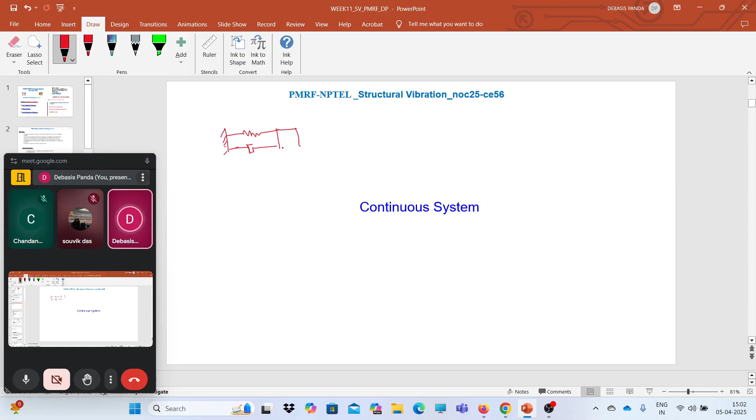we have been dealing with discrete systems where we use spring mass dashpot systems, right? Just recall, we have actually discretized the system as per the generalized coordinates or as per the degrees of freedom. That means we have defined the masses, right? So for the single degree of freedom, we can define this as the degree of freedom, and subsequently for multiple degree of freedom systems, we can add this model, and we solve the shear frame or shear building model using the discretized mass concept. So we can discretize any continuous system, that is not the problem, but there are still continuous systems we haven't talked about.

Like during the first interaction session, I discussed that we can model the mass as a lumped mass where, like, we have a cantilever beam. If we have a cantilever beam like this, we can model this as a point mass, as a single degree of freedom system, with spring and damping properties. On the other hand, we also discussed that we can model the mass as a continuous mass, where the mass will vary as per the length. That means the mass is denoted per unit length, right?

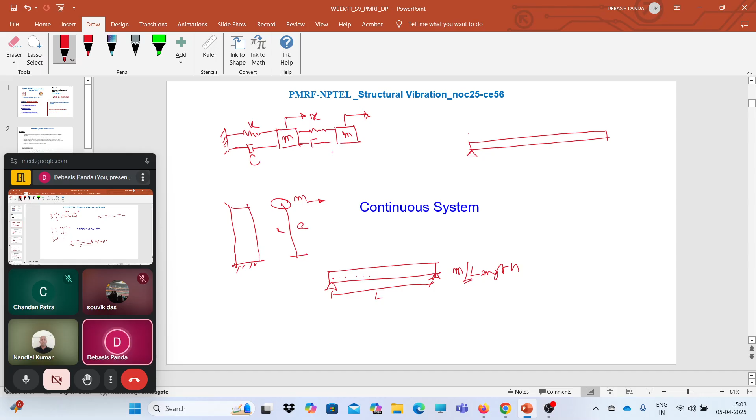So today we will precisely go through the continuous system, how we can solve the entire dynamics of a continuous system. Say for example, instead of any spring mass system, we have a simply supported beam.

Nandalal, yeah, do you want to say something? No, sir, no, sir, no, sir. Sorry. Oh, yeah, no issue.

So if we have a beam like this, say X and Y, and some forcing function is applying over the beam, and the beam has, say, length L, and the beam has mass, say for example m bar. This is the mass per unit length.

Now the thing is, here we know precisely one mass is there because we have modeled this as a lumped mass system or a discrete system, so we know the position of the mass. Now here we can have multiple degrees of freedom corresponding to each of these positions of the masses. That means if we consider a number of points, there should be a corresponding number of degrees of freedom, and correspondingly a number of natural frequencies will come. So how to solve this type of continuous system, or how to capture the dynamics of this continuous system, we will see.

So first, for the transverse loading, if we want to consider the transverse loading case, for a continuous system, we have this beam of length L, which has mass m bar, the mass per unit length. We have the flexural rigidity property EI, and one loading is applied on this continuous beam.

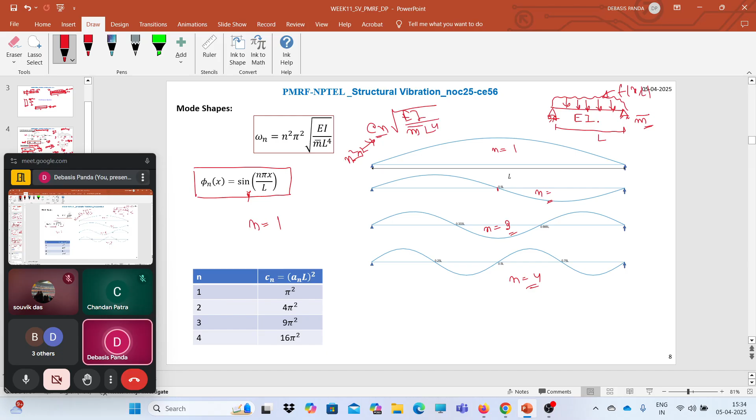So that is the free vibration case for the simply supported beam, and we have seen what will be the natural frequency and mode shape information of this beam. From here you might have this kind of question: for a beam, the mass per unit length is given, EI is given. Now, till now we have considered the loading case as zero because we are considering the free vibration case, right?

We will see the force vibration case. So for now we are considering the free vibration case, that means the forcing function is 0.

So they will ask what will be the natural frequency for the first mode, omega 1, and what will be phi 1 of x for that case. If all this information is provided, you can easily calculate it. Or if asked for the first mode and say the third or fourth mode, what will be the ratio of the natural frequencies, you can easily find it out. Like what will be the ratio for n equals 1, first mode, or n equals 2 and n equals 4, fourth mode.

That means omega 2 and omega 4 for the simply supported beam in the free vibration case. Tell me, what will be the ratio between those two? Same beam, say for example we have a beam - which n equals what? N equals 2 and N equals 4, second mode and fourth mode. What will be the ratio between the natural frequency of second and fourth mode of this beam? Say length L, EI is given and M bar is given, same beam. So what will be that?

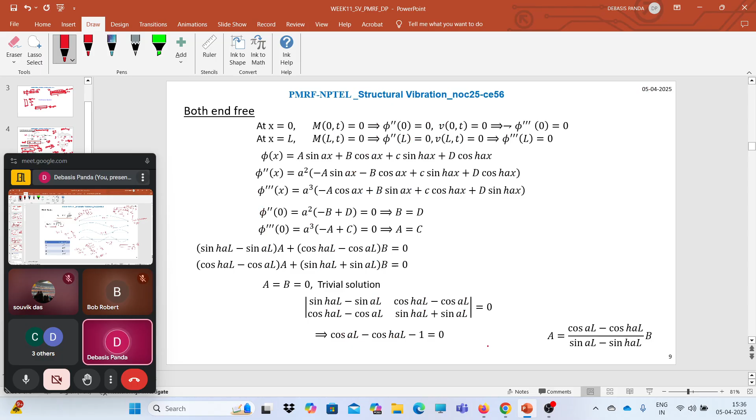I'll just show you this problem. Find out the ratio between the natural frequencies of sixth mode - actually I have changed the question, in your question something second or fourth mode will be there. Sixth mode and second mode for a simply supported beam. So it's nothing but n square by n square because all the properties will be same. So omega 2, omega 4, or omega 6 - here I have considered 6. So it will be calculated like this. Get my point?

Okay, and also they might ask for the natural frequencies. So from this section, what you need to recall is these two parts: what is the natural frequency, and what will be the mode shape information.

So here we have considered a sinusoidal function to calculate the mode shape, but precisely there are other ways to calculate the mode shape. If you have knowledge of the finite element method, their shape function to calculate the shape function - we have different kinds of methods, Rayleigh-Ritz method, Rayleigh method itself, and all these kinds of things. But these methods are irrelevant for now, we'll stick to these things.

Okay, so now if we have both ends free, what will happen? If we have both ends free, we have two expressions - one is for phi of x, one is for y bar of t. Y bar of t is nothing but A cos omega n t plus B sine omega n t, and this is the function with respect to time. This is the function with respect to the shape.

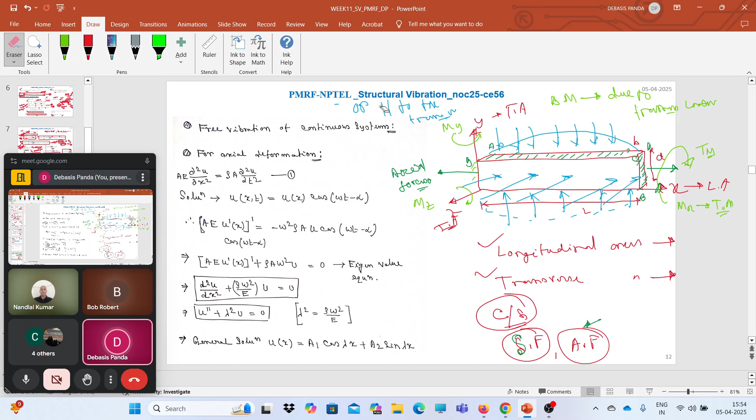Yeah, it's the very basics of civil engineering, and everyone should know this concept. Otherwise how these loads will affect the material and the shape and the geometry, we will not have a clear idea, right? So these things must be clear at the very beginning. As per this axis the stresses are defined, like normal stresses, longitudinal stresses, then on the principal axis the principal stresses. Once you have cleared these basic concepts, everything will fall in proper path.

Okay, now till now we were solving the transverse loading case for the free vibration case. Now we may have the axial loading. So for the axial loading we need to solve the governing differential equation. Now it's a finite element problem.

Like if we have a simply supported beam, or a beam, say for example we have a cantilever beam and an axial force is applying here. Now what will be the case? So for the axial deformation, the governing differential equation looks like AE. I'm not going to derive this expression, it's a very basic expression.

If you look for any finite element book, what is the governing differential equation for axial deformation of a beam, you will find it out. It's simple. Bob, you want to say something? Sorry, I was doing something.

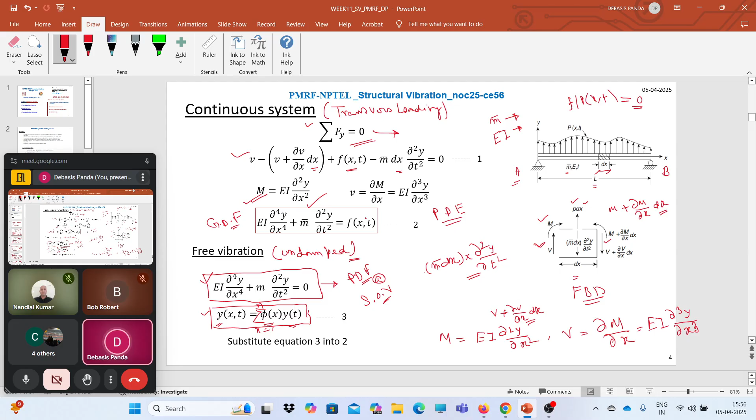So for the axial loading case, similarly, the governing differential equation will look like this. Now for this we can have the solution u here. U of x,t is the variable which caters with the length, and we have one function for the time variable. The process of derivation is quite simple: take the solution, then you just need to differentiate it with respect to time and differentiate it with respect to x, and then substitute within this equation. So finally, once you substitute this, you get this equation: d2u/dx2 plus rho, which is the mass per unit length, or the density of this beam, whatever you want to define, omega square by E, u is equals to 0.

So finally, this equation, just recall, u double prime (x) plus rho... or simply we can simplify this equation like this, some constant lambda square into u is equals to 0, where lambda square we have taken as rho omega square by E.

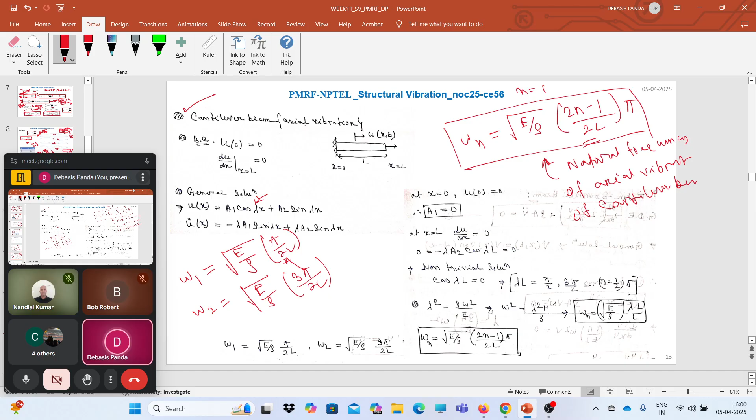What will be the second frequency? Omega 2 will be under root of E by rho. Now instead of n equals 1, you put 2. So 4 minus 1 is 3, 3 by twice L. By this way we can calculate the natural frequencies and corresponding mode shapes.

For the mode shapes, phi(x) is nothing but C sine(lambda n x), and lambda n we have already calculated. So for the first mode this will be n equals 1, for this, n equals 2, this part 0.5 into L, and so on. We can formulate it like so.

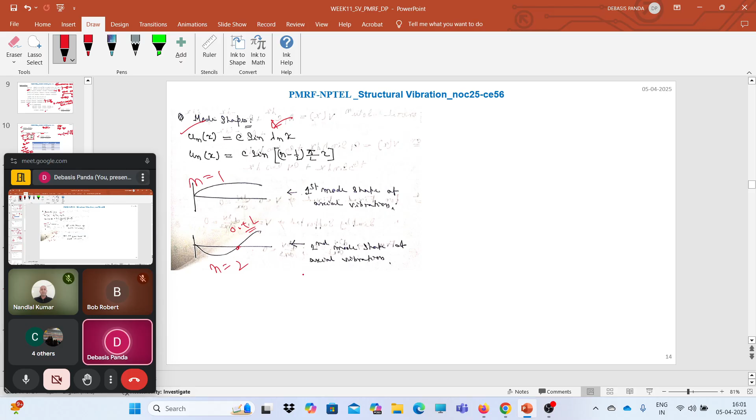For this kind of cases, I will recommend just take a pen and paper. If that thing is relevant to your work, then take a pen and paper, do all these derivations and implement it in MATLAB to clear all the concepts. If we are doing it for assignment solutions and exam purposes, then you don't need to look into those derivations, because the derivations are irrelevant to solving your problems. Your problems will be very simple, not like related to that derivation. I will show you the problems - one problem I will already explain to you. It's simple, but you need to have this concept, to know from where I am getting this information and all these things.

Now let's talk about the orthogonality of mode shapes. When we first discussed the mode shape, we discussed the orthogonality property of this mode shape. Recall, if we consider phi as a modal matrix, phi transpose M phi is nothing but M, and this ultimately becomes the identity matrix. Now phi transpose K phi is the modal stiffness, this is modal mass, and phi transpose C phi gives the modal damping properties. That means we already have the orthogonality property - if we apply this transformation, we will have orthogonal matrices of these things. And also we have seen that phi n transpose phi m should be 0; only phi n transpose phi n should be 1.

Now we will see whether this concept of orthogonality works for this continuous system or not. Obviously it will work, because in a similar way, or based on similar assumptions, we have derived that mode shape, so that orthogonal property will satisfy. So how can we say that orthogonal property will satisfy? We need to show that either phi m transpose some function phi n equals 0, or we need to prove that for the same mode, phi n transpose phi n, that means orthonormal property, leads to the conclusion that modes are orthogonal.

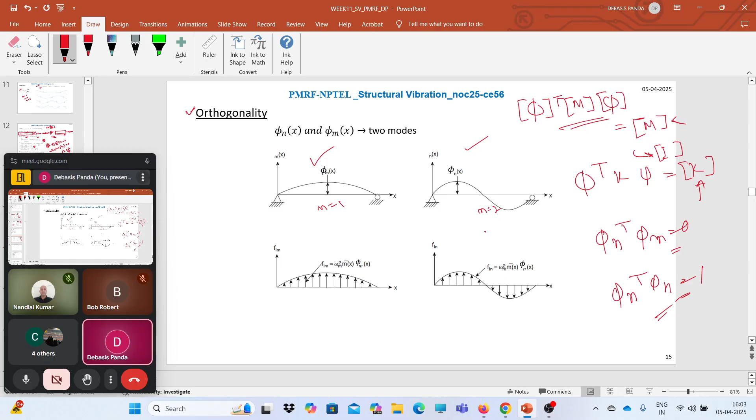For that, we need to look for the inertial force related to this. So we can easily calculate, for n equals 1, what will be the inertial force I_m. That will be related to phi_m, which is related to omega_m. This is related to omega_n, because we know particular mode shapes are related to this.

What was the definition of the mode shape? Tell me, we have discussed many times the definition of the mode shape. Tell me, what is the definition of mode shape? How can you define a mode shape? Only then can you understand why I'm writing omega_m and omega_n. Bob, what can we say, what is the mode shape?

Mode shape is nothing but... Nandlal, what is mode shape? Shapes are actually, suppose that is a first degree, here now first mode, then both ends will be node, and antinode will be... Just I'm asking you the question, what is the mode shape? Define mode shape, what I will say.

What will be the shape of the beam in that? Just forget the beam and all these things. What is the mode shape? Just with respect to some structure, you can consider any structure, forget the beam. Displacement at each degree of freedom? No, displacement at a degree of freedom cannot be the definition of a mode shape.

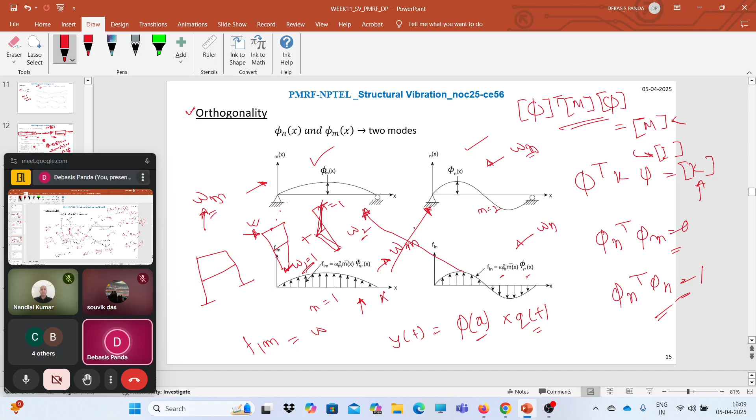Here we have these two, inertial force into mode shape. We simplify it and get this nice, short expression: omega n squared minus omega m squared, times integral from 0 to L of m bar x phi n(x) phi m(x) dx, is equal to 0.

Now omega m cannot be equal to omega n, since two natural frequencies cannot be same. So what are we left with? We are left with this part equal to zero, meaning phi n multiplied by m bar x phi m is equal to 0, and that satisfies the orthogonality property.

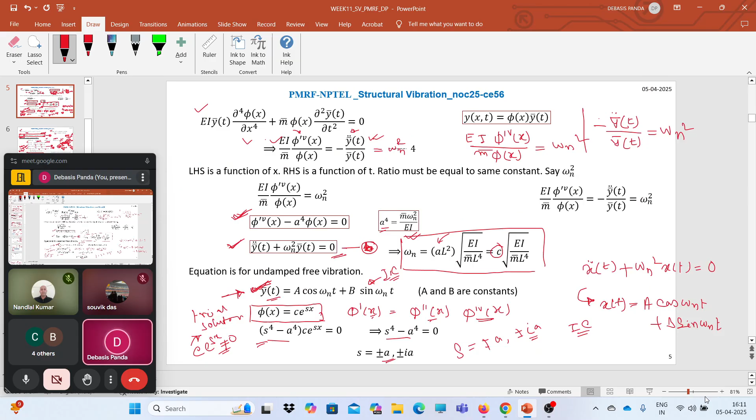Now we have left with the forced vibration part. For free vibration, recall that as we considered two functions to solve this PDE using the separation of variables scheme, we have two functions, one with respect to shape and one with respect to time. Once we solve it, we get the natural frequency and total response in terms of this.

Recall the single degree of freedom system: y of t is equal to a n cos omega n t plus b n sin omega n t. This part comes from the modal information which we use for the continuous system.

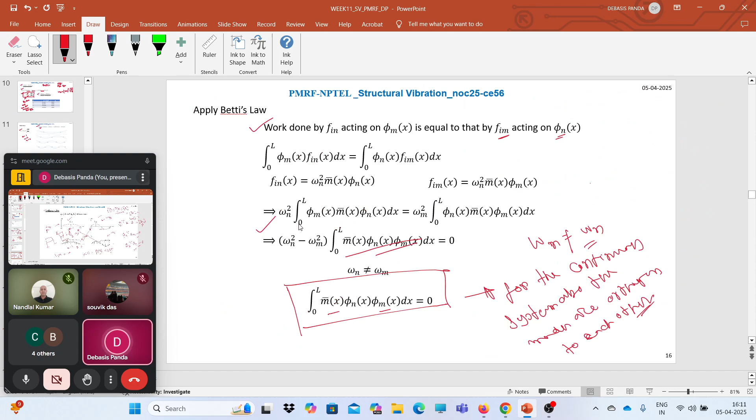That means we can have n number of masses or points, and at each point, if we consider each degree of freedom, then we may have n number of degrees of freedom.

So for example, the question is like this: select the orthogonal condition between two normal modes of different frequencies. We have just answered this: integral from 0 to L of phi m(x) phi n(x) m dx is equal to 0.

Now here, the dynamic response of a simply supported beam due to free vibration is expressed as y of t, using separation of variables, as phi of x into z of t. The length of the beam is given. Select the correct statement - what does the correct statement relate to?

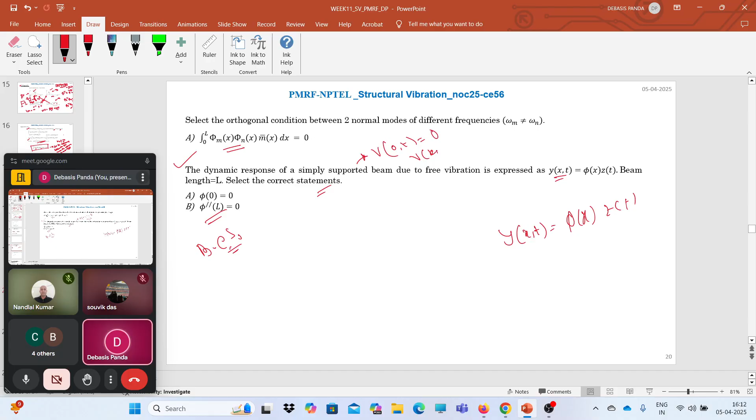Boundary conditions. Recall the boundary conditions for a simply supported beam: the displacement v at x equals 0 is 0, v at x equals L is 0, moment at x equals 0 is 0, moment at x equals L is 0.

From this moment boundary condition, we found that phi of 0 is equal to 0, and phi double prime of 0 is equal to phi double prime of L, which is equal to 0. Let's go back to that - we have already solved it.

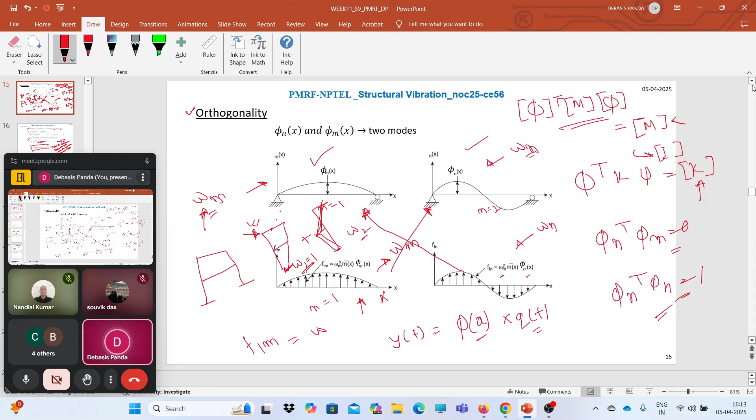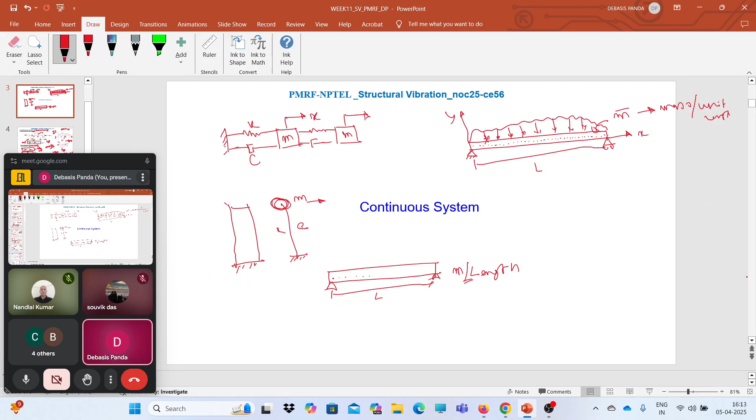What is the equation? One second, just one second.

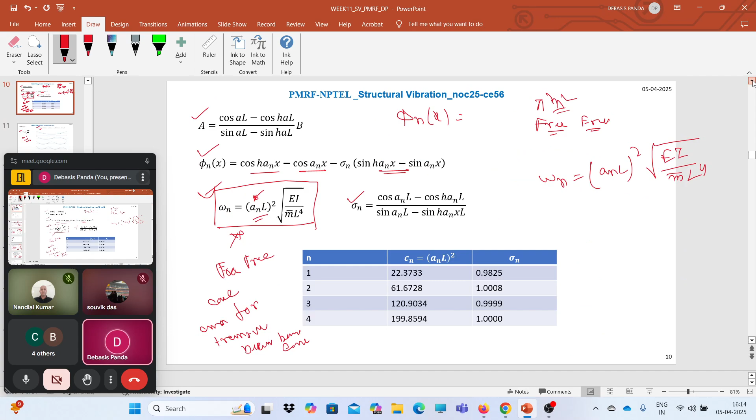Okay, we are talking about the boundary conditions, so you will find it from just a few minutes back - we just solved this equation. Where are they now? Oh, here, these two. Get it?

So we'll have phi double dot of 0 is equal to 0, and phi of 0 is equal to 0, and phi double dot of L is equal to 0. So as per the question, you just need to select the answers.

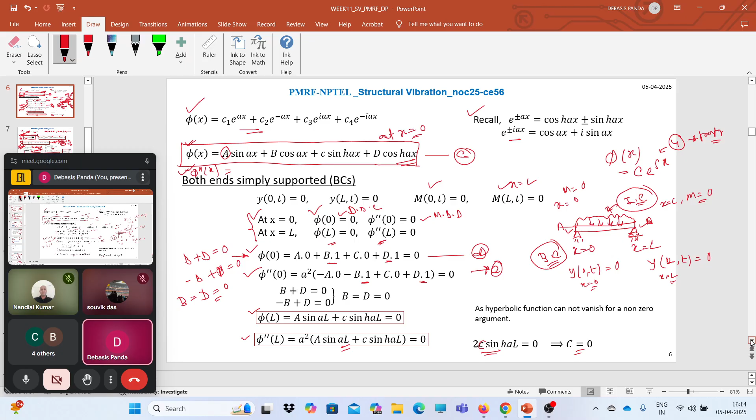Now, before going to the forced vibration part, let's quickly solve some more examples. Just focus on that - we have already discussed this.

Find out the ratio between the natural frequency of the sixth and second mode of a simply supported beam. For a simply supported beam, the natural frequency is n pi by L squared, under root of EI by m bar. So what will omega 6 by omega 2 be? Everything else is same, so it's 6 squared divided by 2 squared, that means 9.

Now the second example related to the forcing function. First we need to go through the forced vibration part a little bit, then I will come to it. Let's just spend 5 minutes here.

Now let's consider the forced vibration case. Like here, the question directly asks for Mn, the modal mass, and K, the modal stiffness. We just need to find it out from the forced vibration case. So just for a few minutes, bear with me, then we will solve this example.

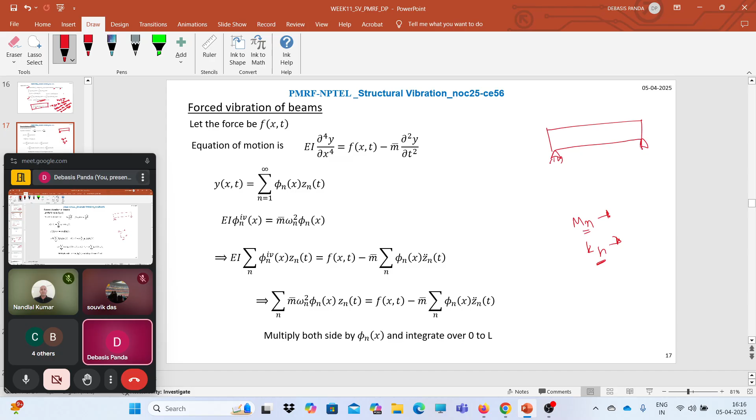So now we are considering the effect of force also, that means we will have a forcing function too. So this was f of x comma t applying over the beam of length L, and it has the flexural property EI and mass per unit length is m bar.

So the governing differential equation, just recall the governing differential equation: EI d4y by dx4 plus m bar d2y by dt2 is equals to f of x comma t. And we try to solve this equation using the separation of variable scheme.

Y of x comma t will be nothing but, if we have nth mode, then summation of n equals 1 to infinity, phi n x, zn of t.

Now similarly, if we simplify this equation and put it back into the first equation, we will have EI phi n, 4 times derivative with respect to x, multiplied by zn. Zn of t is the time dependent part, that means the modal responses, or generalized responses, equals to f of x. We are just simplifying this equation, so we will live with this equation.

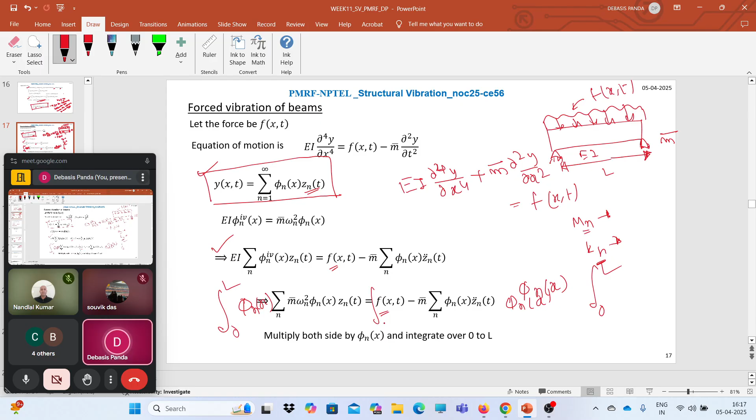Now what we need to do is just multiply both sides with phi n of x and integrate from 0 to l. So multiply by phi n of x, that means obviously that will be 1 transpose there, 0 to l, again here 0 to l. So if we simplify this equation...

we will get this: omega n squared zn, integral 0 to l m bar phi n x dx, is equals to phi m x f x comma t, zn and phi n squared x. Now if we simplify this equation, we will have it in terms of the dynamic equation we are familiar with, like mn zn double dot of t plus omega n square mn, that means k mn, zn of t is equals to fn of t.

Now if I want to simplify this equation, say this equation is 1, and I have simplified it to equation 2. So what will be the quantity of mn? Mn is nothing but this part here: 0 to l m bar phi squared dx.

What will be the fn? Fn will be the integral 0 to l, phi n x comma t, function of x comma t, dx. Now finally, if we want to complete this equation, it will look like zn double dot of t. Recall a similar type of equation we solved for the vibration case for a single degree of freedom system, or for the modal coordinates in a multi-degree of freedom system.

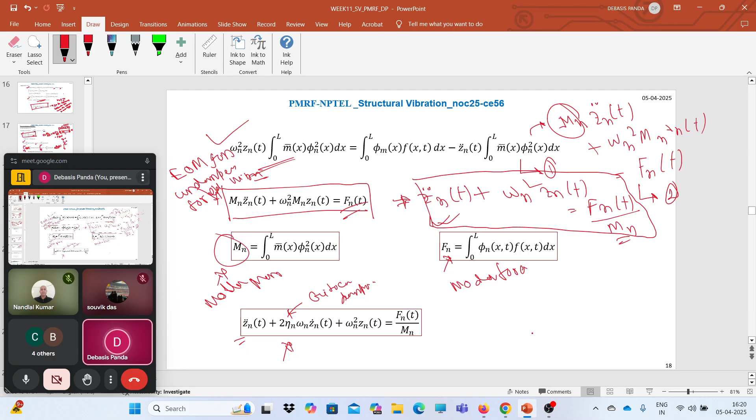It's not like a few percent damping, 4-5% damping, where some diminishing occurs. But if I want to completely diminish the vibration, we need to apply the critical damping. So we have defined the critical damping and all this part. Just go back and see the earlier video lectures, so you will find it out.

Now we can solve this problem here. Just pay attention to this problem. I have changed the data, I've changed it a little. I will tell you how you can correlate it with your problem.

It will take a minute to solve your problem if you focus on it. So a concentrated constant load of 20 kilonewton is suddenly acting on the midpoint of a simply supported beam. Suddenly acting - there is a simply supported beam and one concentrated load of 20 kilonewton is suddenly acting on this beam.

That means suddenly acting on this beam means it will create vibration, right? It will create the vibration. I will discuss some more concepts.

So in practical terms, does it look like when something falls on the structure, or when there is a sudden collapse from a building? In real terms, what can you relate it to? Yeah, it's sort of an impulse force. Impulse. Okay, and we have solved response for impulse forces.

Recall the Duhamel integral we used to solve impulse forces, generalized forces. It's sort of impulse - it will create vibration on the system, right? It's an impulse, meaning this force is acting suddenly for a small duration of load.

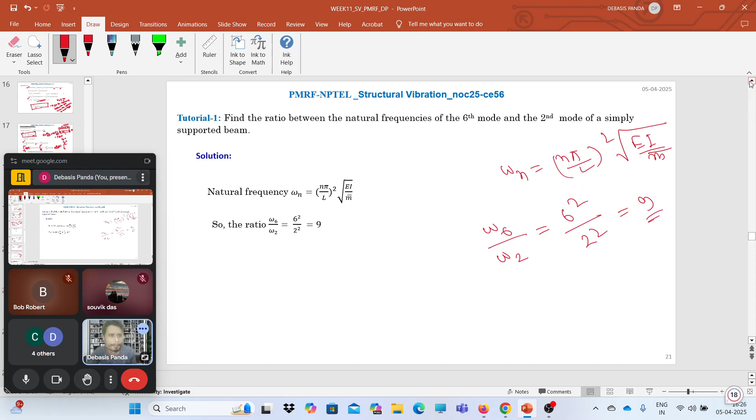We have just seen this a few minutes back. Generalized mass is nothing but the integral from 0 to L of m-bar times phi n squared dx. That means for the corresponding mode shape you need the mass per unit length. If you have these two pieces of information - modal information and mass per unit length - you can get the modal mass.

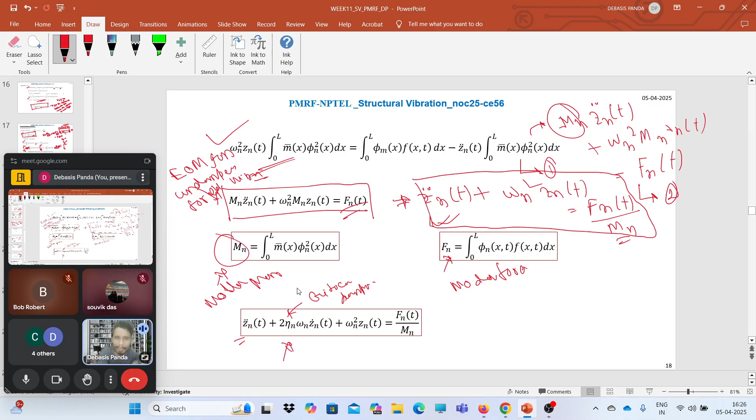Recall when we solved that multi-degree of freedom system, the modal mass we can easily calculate using phi transpose m phi, or phi n transpose m phi n for each component, to get each component of the modal mass matrix. Here also we will use that equation to get the masses. So for the nth mode, the mode shape is given.

So phi n squared m of x dx. Here m is given as 60, so I took 60 outside the bracket since it's already given for this scenario. Now we're left with sine squared n pi x by l dx. Now you just need to integrate this.

So sine squared x, you just separate it like 1 by 2 into 1 minus cos twice x, that's basic mathematics. Just convert it using sine cos equations, and you will find it like 60 into 4.5 by 2, which gives 135 kg. So for your case, you just need to replace 60, replace 4.5, and you will get the answer.

Get it? But you need to recall this expression, since all the mode shapes for your purposes will be given in terms of this sine function, sine n pi x by l. So how to integrate that square of sine n pi x by l? Please recall this, this kind of question will come in your exam.

Is it clear how to solve this problem? Yes or no? Bob? So in this case, the n was replaced by what? What is the value of n?

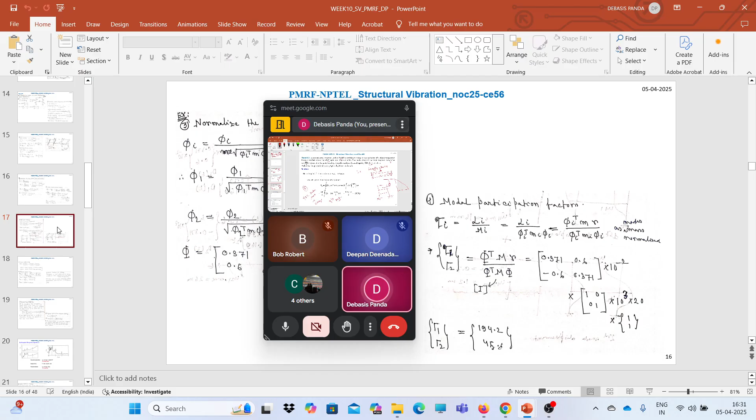Just one minute, I will show you the details because we just discussed these things in the last interaction session. Just wait. And for the seventh mode also we can have almost 98% of the modal mass, I think. And how you can calculate this, just go through the previous lecture. I have explained how we can calculate the effective mass and how many mode shapes we need to consider for an nth mode system. Just a few minutes ago we already discussed these parts.

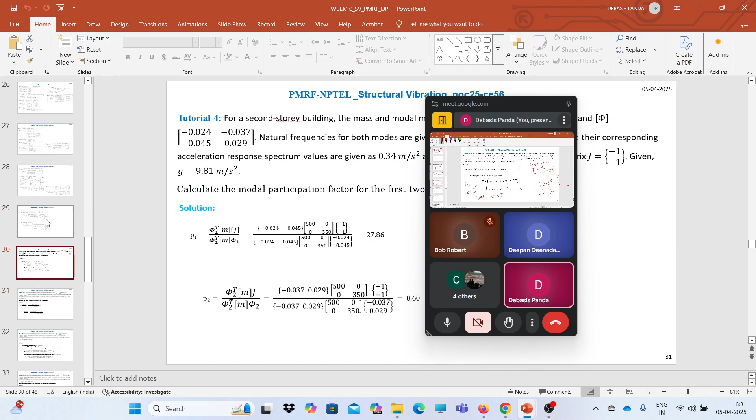Where are the things, where are the things? Just let me go through it once. You just need to consider the mass which accounts for 90% of the modal mass here. Just one second, I will share the screen.

We already have discussed these parts. I think you have missed it somehow, but I suggest you go through the previous week's lecture. Just wait, I will show you that part.

Week 10, if you go to that slide number, all these things I have explained, how we can calculate the modal mass participation, and we have solved a few problems related to this. 90 to 95% of the modal mass, if we contribute it, we need to know how many modes we need to contribute, up to which mode that 90% modal mass is covered.

So generally up to the fifth mode, 90% modal mass is covered, and up to the eighth mode, 95% of the mass is covered. The modal mass we can easily calculate using this formula: Li by mi, where Li is nothing but phi i transpose m r. So just go through the previous week's lecture, you will find out how many modes you need to consider.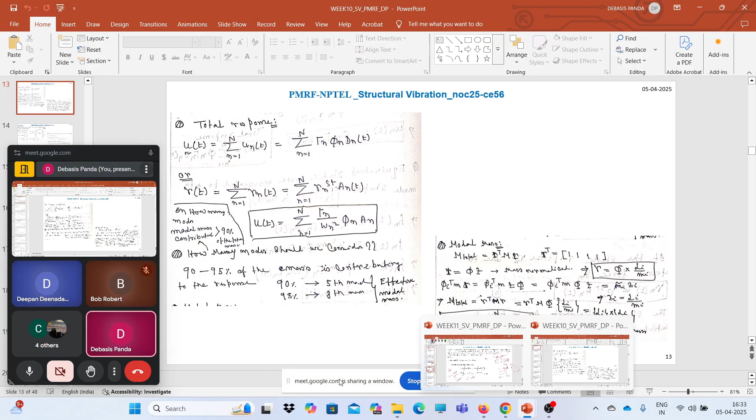So that was your question, right? Yes, yes, yeah, or else you have asked something else and I have to find something else. Anyway, let's go back to our presentation.

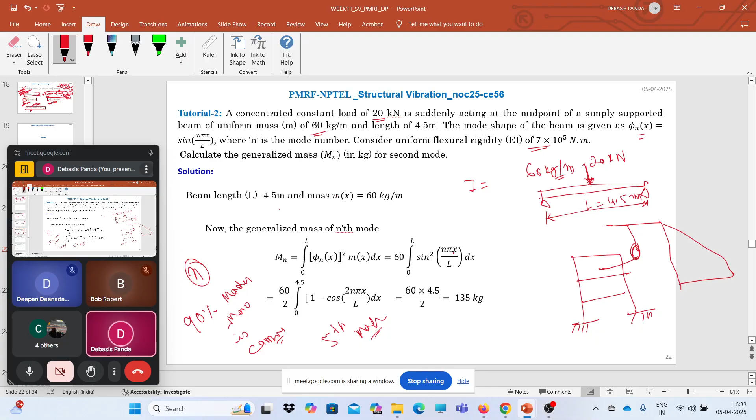For this question, they have given the mode shape, generalized mode shape in general term, n pi x by l. Now for n equals one it will be different, for two it will be different. You need to calculate the modal masses. These things have not been covered yet, like for a multi-degree of freedom discrete system, what will be the mass participation factor for each mode - you can calculate it. Just go back to the previous lecture, you can find it out.

Now for the third question, a concentrated load of - so the previous question is clear, right? A concentrated load of 30 kilonewton.

Deepan, you are from where? Yeah, clear, clear, thank you. No, Deepan, you are from where? Which course are you currently pursuing? This course only? No, no, no, like are you an undergraduate student, postgraduate student, or a research scholar? Postgraduate student. Postgraduate student, where from? Which institute are you from? Anna University? What, Anna University, Chennai? Oh okay, okay, okay. I have seen you in my previous few classes, but like Bob, Nandalal and Sovik Chandan, they are continually attending the classes. That's why I'm asking you, and I know them, like Bob and Nandalal.

Now this question: a concentrated constant load of 30 kilonewton is suddenly acting on the midpoint of a simply supported beam of mass 60 kg per meter. Length is given as 4.5 meter. The mode shape of the beam in the nth mode, phi of n, is given.

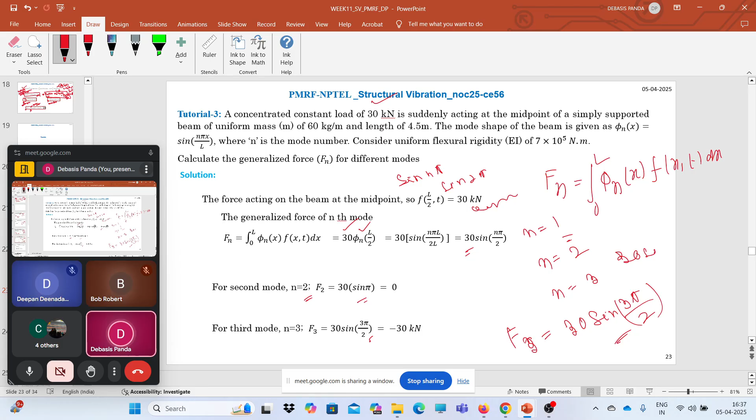That will give you the confidence to solve. For the second mode it will become 30 sine of twice pi by 2, that means sine pi, so that will be 0. For the third mode it will be 30 sine 3 pi by 2, that means sine 3 pi by 2 minus 1, so minus 30. For the first mode we can calculate like 1 pi by 2, so sine pi by 2 we know the value, so that will be only 30.

So for the first mode, if they ask for the first mode, n equals to 1, so f1 will be 30 sine pi by 2. Now sine pi by 2 you know the value.

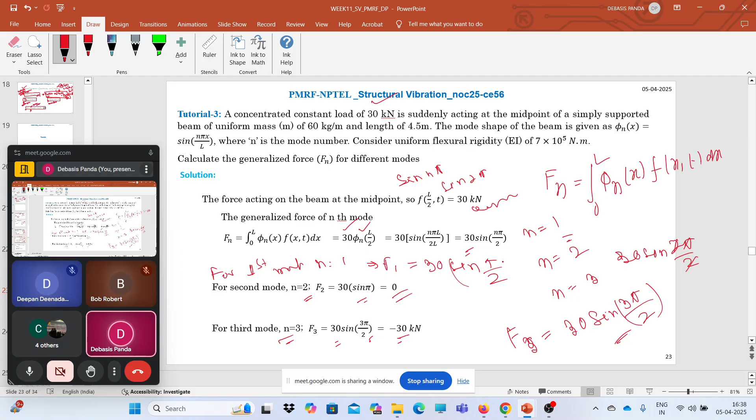Now the second question related to it: a concentrated constant load of 30 kilonewton again is suddenly acting on the midpoint of a simply supported beam of uniform mass of 80 kg per meter, and length is given as 4.5 meter. So m bar is given 80, L is given. The forcing function f of x comma t is suddenly acting on this system, given as 30 kilonewton. EI is given. Phi n again this was given, the flexural rigidity. Calculate the natural frequency for first and second mode.

What was the equation for the natural frequency? Recall, omega n is equals to n pi by L square under root of EI by m bar. Now you have all the information. Just for the first natural frequency you just need to calculate omega 1 is equals to, n is equals to 1, so pi by 4.5 was the length, under root of EI, that means 7 into 10 to the power 5 by 80, that will give you

45.59 rad per second. Now what will be omega 2? So n pi, n will be 2, that means 2 square 4, 4 pi square by 4.5 square under root of 7 into 10 to the power 5 divided by 80. That will give you 182.36 rad per second. Great.

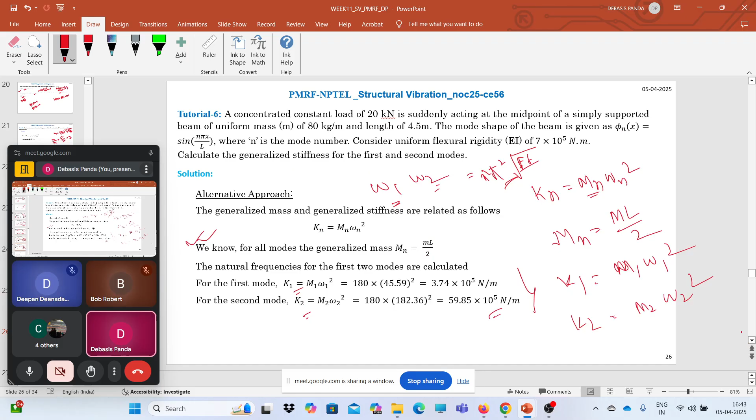Okay, we have another question here from the displacement response. Okay, great. So before that, we will solve this one.

A simply supported beam of length 4.5 meter, subjected to a loading f of x comma t equals 10 sine 100 t kilonewton. Calculate the generalized force for the first and second mode. So again they have asked for the generalized force.

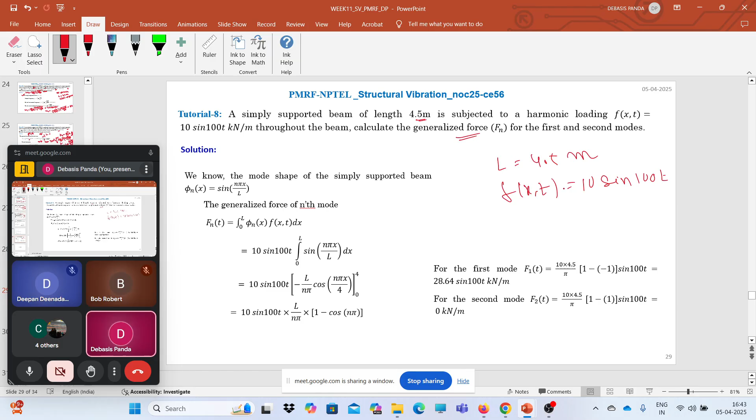Generalized force, we know Fn of t is nothing but integral 0 to L of phi n of x times f of x comma t dx. Now f of x comma t, we need to get it out from the integration, because here only a function of t is given, so it cannot be integrated with respect to dx, so it will be constant.

So take it out from the integration and we are left with integral 0 to L sine n pi x by L dx. After rearranging, the generalized term Fn of t is 10 sine 100 t times L by n pi times 1 minus cos n pi, if we take it out.

Now for the first mode, cos n pi means cos pi, so 1 minus minus 1, it will be some value, 28 point something. You will get like 19.1 multiplied by 2, so 38.2 something for your data. For the second mode it's 0 for your case and for this case also. I have simply changed here, instead of some values 20 or 30, and instead of 4 meter length I have changed it to 4.5 meters.

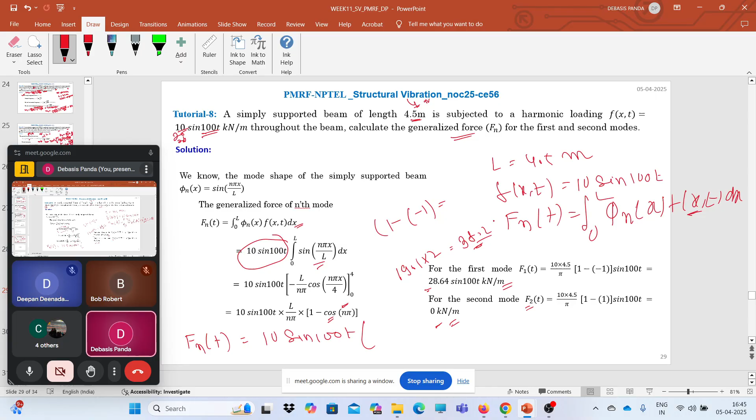So you will have two values like 0, and here 19 into 2, like 38.2. So that will be the correct answer for that question.

Now we are left with one more question. Calculate the total displacement at the midpoint of a beam at t equals 1 second due to a concentrated constant force of 20 kilonewton suddenly applied at the midpoint of the beam, considering up to 3 modes only.

So we need to calculate the response considering up to n equals 3, meaning up to the third mode. So we need to calculate all these parts. First, what do we need to do? We need to calculate the generalized force acting on the midpoint.

So force acting on midpoint, that means phi at L by 2, which comes as 20 sine n pi by 2. On the previous question we solved a similar kind of thing. So displacement at the midpoint, what will be the displacement value? Recall y of x comma t equals sum from n equals 1 to n of phi n of x times Zn of t.

So at t equals 1, we need the information regarding Zn, and we need the information about the forcing function. So for the first mode, what do we need to do? First we need to calculate F1, the generalized force at the first mode.

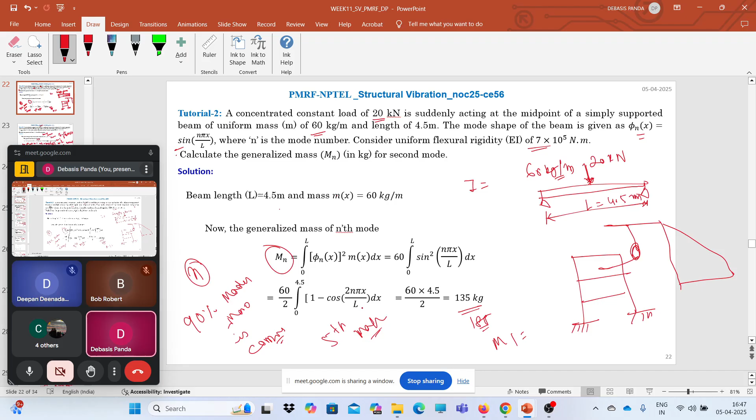It's a continuation question. So you will get 180 kg instead of 135, because here we have 20 kilonewton and 60, and on that question we had 80 and 20 kilonewton. So first, what you need to do is calculate mn. From this equation you will get what m1 is for the first mode.

So for the first mode you will have 180 kg. Now omega 1 corresponding to that is given as 45.59 rad per second, already calculated because it's the continuation of the question. And for the first mode, phi 1 is 1.

So at t equals 1 second, what will be the z1 value? Because we need to have these generalized coordinates from the modal information.

Now for the step or impulse loading, from the Duhamel integration, recall what was the Duhamel integration term for impulse loading: 1 by m omega n square, 1 minus cos omega nt, for the undamped free or forced vibration case. And for this unit impulse, if we have the force Fn, then Fn by m omega n square, 1 minus cos omega t. From the impulse response function, just recall that.

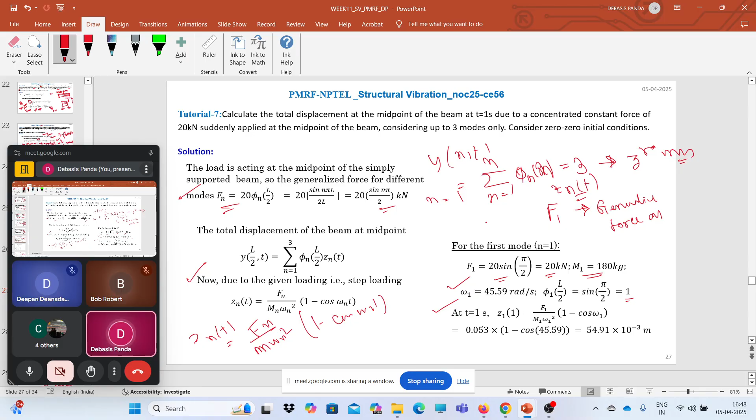And if we have the damped natural frequency, the equation Zn of t will look like Fn by m omega d, e to the power minus zeta omega nt, bracket 1 minus cos omega dt. So we need to use this as the response of this step loading.

Now if we have Zn of t, we can easily calculate what will be Z1 of t, Z2 of t, Z3 of t, because we need to consider up to 3 modes: Z1, Z2 and Z3.

So for Z1 we need to formulate this equation first, then put n equals 1 and t equals 1, because for t equals 1 second we need to calculate. If we calculate that, z1 of t comes as 54.91 into 10 to the power minus 3 meter. Similarly for the second mode, if we look for f2, we need to calculate.

So f2 will be this, m2 is 180 kg, and the modal masses, I think for this case all will be 180 kg, considering up to midpoint. So 180 kg for all modes, or 185 kg as per your data. I think it comes as 180 kg for each mode, like I have solved it using MATLAB, so it gives me that number.

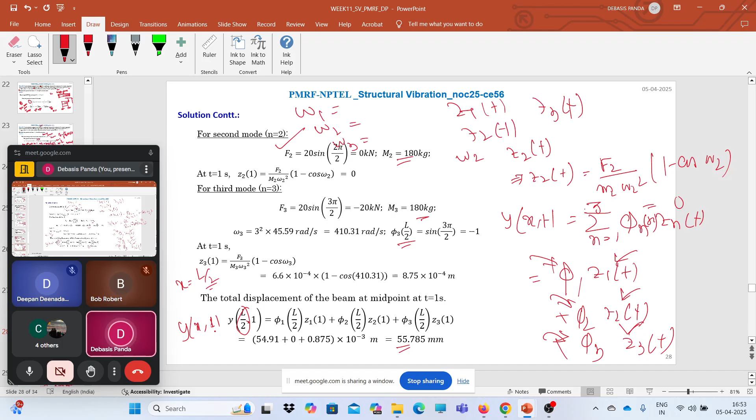It's quite lengthy, I think this big question will not be asked in your final exam, but here for three modes they ask for the three modes - maybe they twisted this question like this.

Calculate the response for the first two modes. This can be calculated as three questions: first find omega 1 and omega 2, calculate m1, m2, then f1, f2, and finally calculate the modal response at the midpoint for these two modes, adding all of them together.

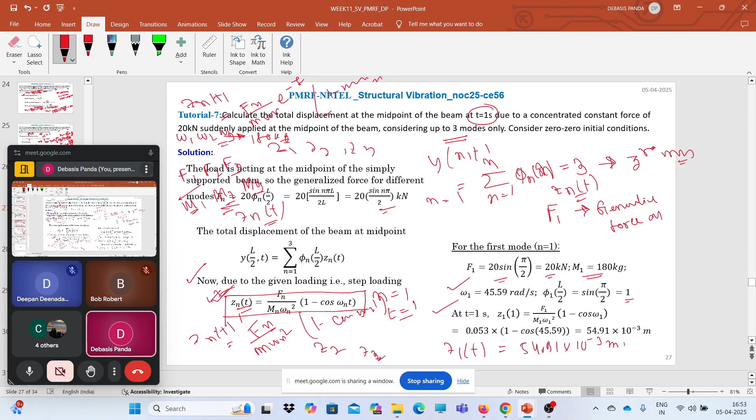In this equation, for the first question, we used phi n of x as a general mode shape. Now if we define the position x equals L by 2, we can easily calculate the value of this mode shape at x equals L by 2, for n equals 1, 2, 3, 4, 5, 6, and so on. These are the basic ways to handle this kind of problem.

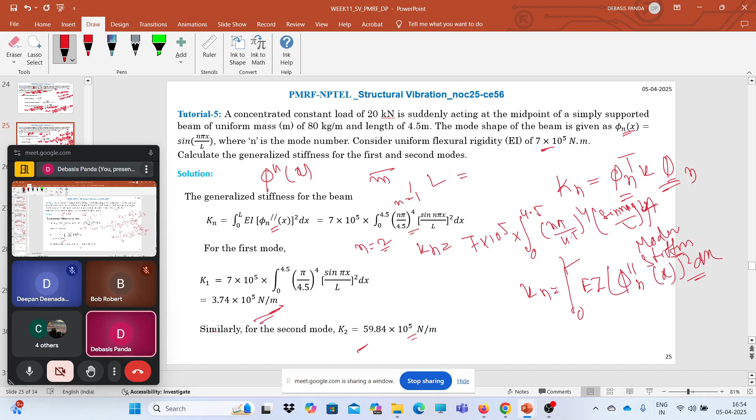For the continuous system, short kind of questions cannot really be prepared, but still this kind of question may appear in your exam. They will not ask for k, but for f and m, and particularly for omega, that means the natural frequency. For example: calculate the natural frequency for a simply supported continuous beam whose mode shape is given, whose mass density is given, and whose EI is given.

Generally we solve this kind of continuous beam problem using the finite element method. We discretize it first, then we solve it. But still we can solve the continuous system directly. It will be a little computationally heavy, but for the concept it's okay.

Do you have the background regarding finite element method? Do you have any background? FEM - then only can we easily combine the continuous system and the multibody dynamics.